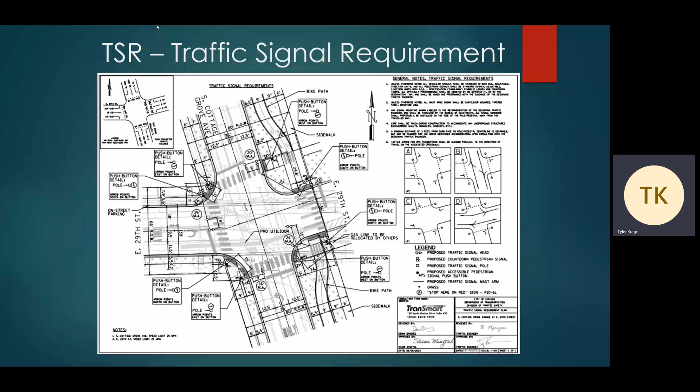Moving on, we talked about TCS. That is essentially our conduit plan. It stands for traffic control signals. I didn't say that up on top because it's kind of more than that, right? It's a unique idea that engineering builds this whole thing, and it's looking at what foundations are needed, looking at the conduit types that are needed, looking at cables, looking at all of the hard engineering type side of things like that. So we will not go into that as much today - those are in another realm of CDOT.

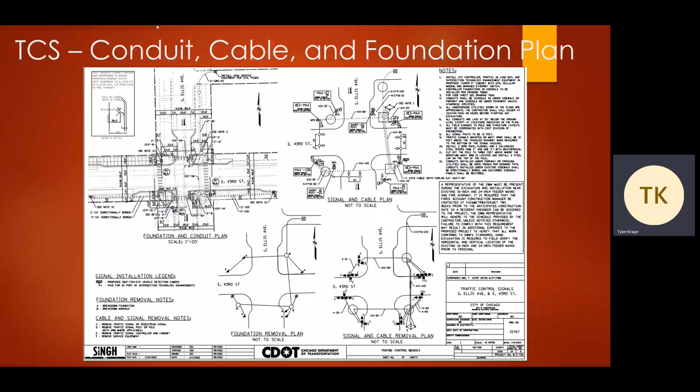Maybe we'll do another one of those later someday, but we're not going to do that today. What we will talk about is the TS - timing, schedule, plan.

What is the signal timing that we put into the controller? That's what these sheets dictate. On the left side, you can see we have a NEMA plan, the Cadillac of what timing sheets are, and there's a lot of adaptability with these.

So every time we're putting in a new signal, we're using NEMA. On the right side is an interval sheet. Before I came here, I'd never seen an interval sheet before. It does exactly what you tell it to do, right?

So the thought is that there's not a standard, there's not a conflict monitor necessarily, but essentially each one of those grids and the filled in blanks and the table on the bottom there, that's essentially telling what is running with what. You're looking at every single signal head. You're deciding, hey, this is R3, or maybe green 3, or whatever it's designated as, and that tells you what it's doing at that certain interval.

We still have intervals, but as we're going through, we are updating all interval sheets to be NEMA. It's just there's a controller update that's needed, and there's a lot of work that goes into it. So we're moving to the spot where NEMA is the new standard.

We still have a few—shouldn't say a few. We have 3,000 signals. We have a good amount, probably half are in interval. So we're getting there.

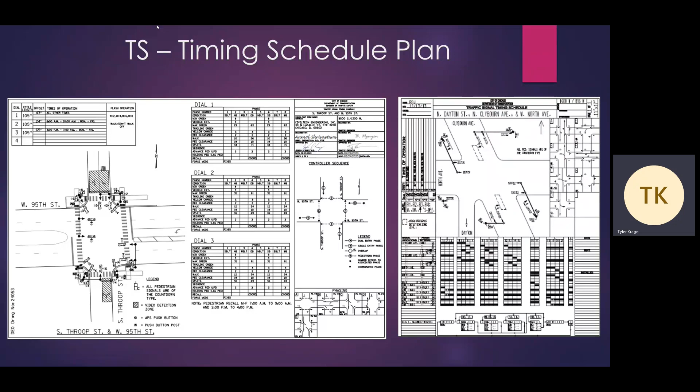Okay, so what does this stuff even mean? Where are we even at in the process, right? All these letters mean something, right? We don't just do this stuff for fun. Here's the process of what it looks like, right?

So what happens is traffic safety receives a TSR, the traffic signal requirement, and that tells us everything about where the design is. We'll review it, give comment on it, and we'll approve it once it's set and meets CDOT standard and compliance of CDOT rules, essentially. Once that is set, the TCS plan can get made.

So we'll send this to engineering. They will not start a TCS plan unless the TSR is already approved and made. The reason being is that things can change—you can move poles here and there. They don't want to even start until it's fully fleshed out and approved.

There's a few situations where we're allowing that to happen because of expedited things. So if you're working on a project where we're not done doing the TSR yet, that's because of that. We're experimenting a little bit with doing the TCS and the TSR in parallel, and then anytime there's a conflict, we update the TSR, put out a revision, that type of thing.

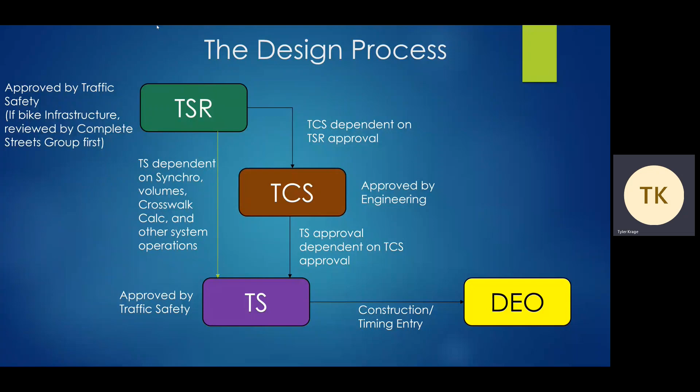So that's the idea behind the process. How do we make our lives easier? How do we make my life easier? How do we make your life easier? So what we did is we built a QA document looking at everything we think about when looking at timing sheets, when looking at TSRs—any of these things we check. How can we keep tabs on what needs to go into this sheet, just as a guideline?

I should add a clarifying point here too. Up in the corner, it says draft in big bold red letters. That will probably never change—this will be a living document. The city is adapting, we're learning new things, we're trying new things. We don't want anybody to say, 'we did exactly what you said, so it should be good, we don't have to think about it.' We don't want that to be the case. This is going to be a living thing.

We will figure out some way to get it posted online or sent out—we'll figure that out when the time comes. The point is, this is a draft. So yeah, that's one thing to think about.

The other thing to think about is, as consultants, you're putting your name on these things that are getting built. At CDOT, we're putting our names on it, but we're also asking consultants to put their name on it too. We need to make sure QA/QC is happening, because not only will it make your lives easier for deadlines and for going back and forth on comments, but the more rounds of iterative comments you have going back and forth, the worse it's going to be.

So please make sure that as a consultant—or if you're an entry-level engineer, a professional, or the person approving or reviewing this stuff—we really need to make sure these are getting looked at. Out of all these, we have a few consultants where we're fully confident in what they do; we'll still check it, but there's a few where we're excited to see the work they give. Sometimes we do not have that, and we know who those people are.

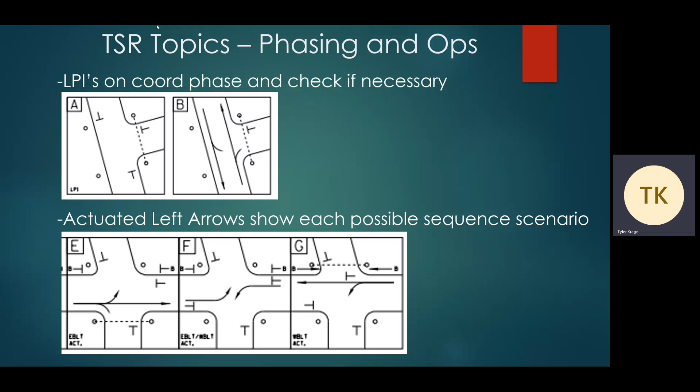So I'm going to jump into the next one, which is a lot of what we dig into when we're looking at these TSRs: where do we put these signal heads? Because we want to make sure that these are exactly what we say they are. We do a heavy amount of review on this.

As many of you may know, we want to make sure that things are as good as they could possibly be. We have a very litigious constituent, so we want to make sure that these are following everything down to a T, and that there's no chances of error or anything causing any mishaps. So that's what this is about.

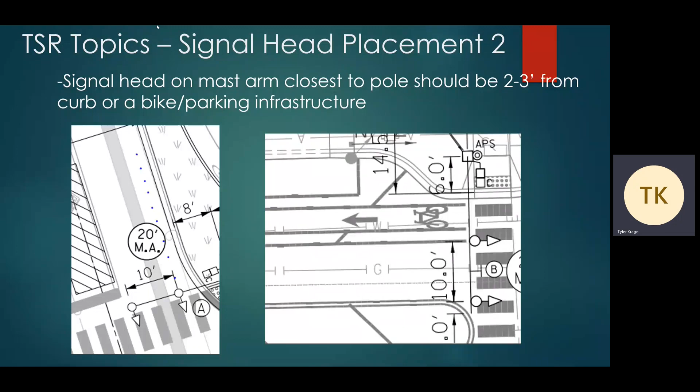So that's just what it is. We can dig into that on why we do that with primaries and that type of stuff. We'll get there if people have questions on it, but for now we're not going to.

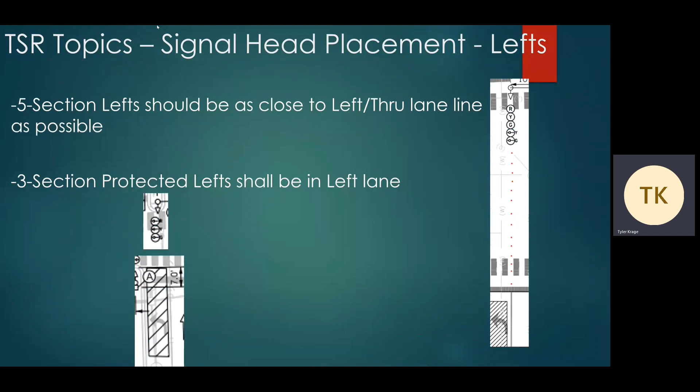At some point we're getting to the point of thinking, oh, well, 2 plus 2 is this because it is, right? So we're going to get into some more interesting stuff later here, I promise.

I have a question for you, Tyler. So left turn lane, 3-section head shall be aligned with the left turn lane. If we're shifting a left turn lane, what is your cutoff for needing to then shift the 3-section head? If it's aligned with the edge of the lane line, is that acceptable, or do we need to shift it? If it's a foot off the lane line, is that a definite, we need to shift it if we're shifting a left turn lane? For example, to accommodate protected bike lanes.

Right, I think I need to actually understand what you're asking. You're saying, would you rather, if you have a protected left, ask your question one more time. If you needed to shift an existing left turn lane at an intersection that has a 3-section head with a dedicated left, just for that left turn lane.

What is the cutoff for, okay, all right, we're shifting this left turn lane 5 feet, and now that signal head is no longer aligned with the center of the left turn lane. It's now 5 feet to the right, like the edge of the left turn line. At what point is that like too much of a shift where you say, okay, now we need to extend the mast arm, we need to shift the case by case?

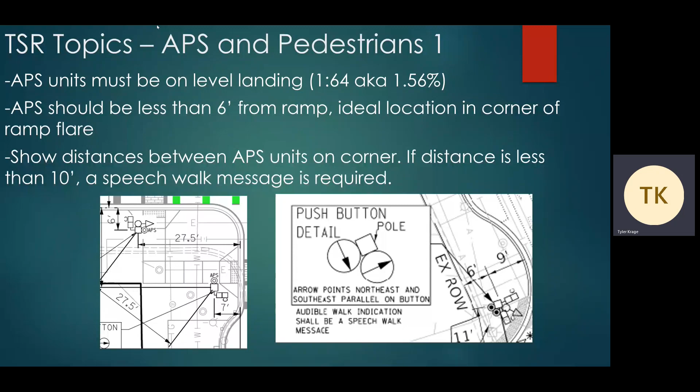The one on the bottom is the salt shed. If anyone hasn't been there yet, it's a cool spot. That's Magnolia Blackhawk - we did a lot of work on that intersection. This is the unique situation, there's a lot that happened here and a lot going on here. So if you're catching a show there, check it out. People love it when you're with your friends or significant other and you're showing off your amazing traffic signal knowledge.

It should be flush with that intersection. 10 inches is the smallest extender that we can get. So if it's smaller than 10, that's also allowed within ADA requirements and CDOT compliance. But if it's more than 10 inches, that will need an extender.

This location actually did use that. It wasn't necessarily right there, but that distance needed an extension because it was just too far to get pushed. It was just far enough out of the way.

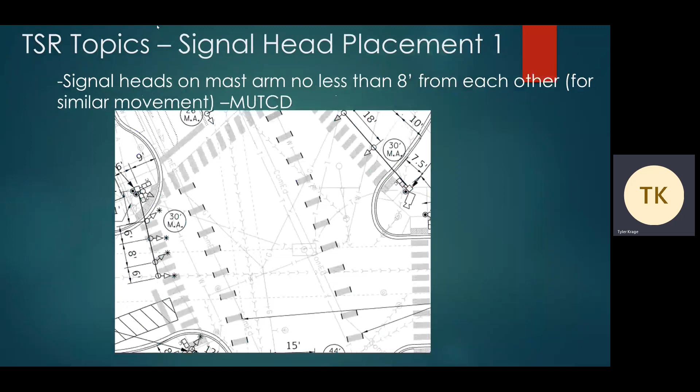So when you're doing these TSRs, it's really important to make sure that, since we're doing a lot of new developments, if you have maybe not necessarily parkway but possibly a concrete curb dropping with a ramp going down, that needs to be as flush as possible with the accessible path. If not, it'll need an extension.

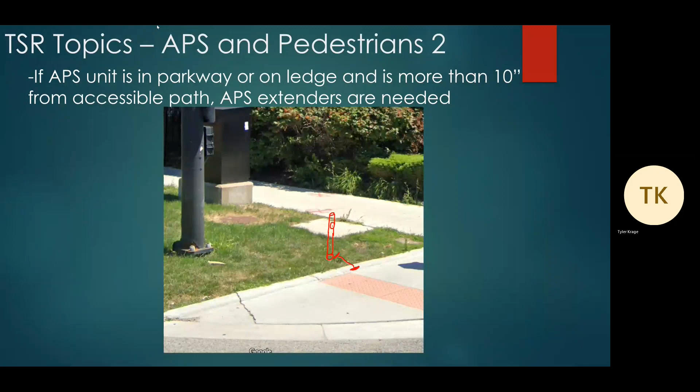In this situation, I think we had about 5 feet from the ramp to where the pole would be. I don't think this is a real location—this is just one I found that had a lot of sidewalk.

5 feet is, if you look in the MUTCD, there's a clause allowing a certain distance of viewing within 10 feet or so from the crosswalk. 5 feet is around the spot where it's unreasonable to expect a pedestrian to see the whole way.

On a similar thought, although you may be able to see it, we don't like to have the ped head farther than 15 feet behind the ramp. While you may see it, it's just better to have it closer for ideal pedestrian use.

And Kurt, yeah, go for it. All these dimensions you're talking about are to center of pole, right? Yes. Or face of curb? Yep.

Okay, do you have any guidance on when you can't put the signal pole right next to the crosswalk and you need an APS—any guidance on trying to move the signal pole versus putting a separate push-button-only post? Just whatever works, case by case.

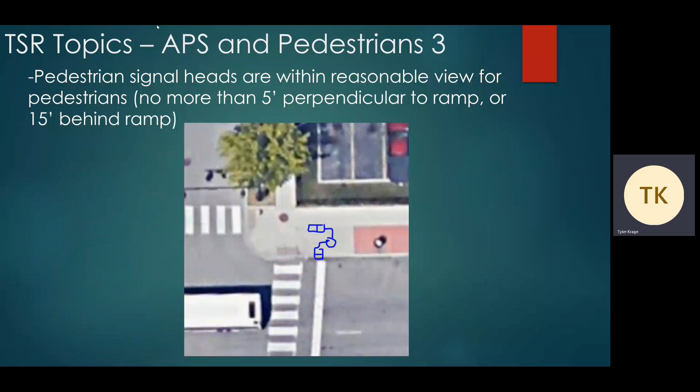Good question. Kurt is gone, but you could probably talk more about this stuff too. When we're doing our review, obviously we have the bike group review all these, but we have some things we think about with bikes as well. The first one, I already said that: make sure that Kurt and Gina and the Complete Streets group are looking at all these plans.

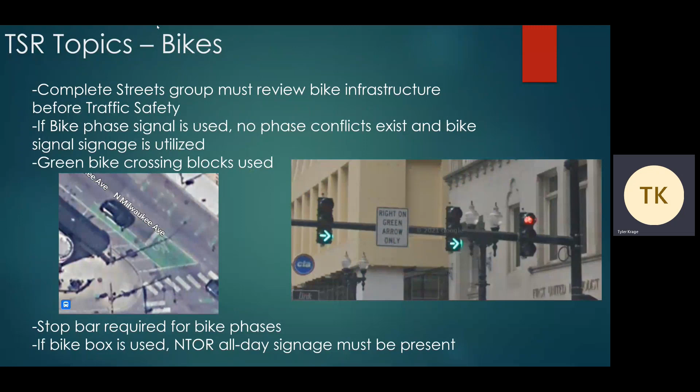TCS guidelines, tough, sorry, we're not talking about that today. We are talking about timing sheets though. So what we're going to do is flip to our QC document. I should be careful mixing up my quality abbreviations here. But looking at this first one, there's two really, really big ones.

And the first big one is housekeeping. When we get timing sheets, a lot of work goes into a timing sheet. You need to have your synchros made. You need to have your crosswalk calculations all made up. All that stuff needs to be made so you can put the final product onto this. So essentially, this is one of the last parts of your design. What are you telling the operations to do?

But the idea here is that you're adding in the distance to the push button to the curb. That is a MUTCD 3 feet per second check. It assumes 6 feet if there's nothing, if there's no push button there. And then the last column is just showing the required walk time needed.

So what happens is with that 3 feet per second check, you'll need to add any time that is needed, needs to go to the walk. The walk is dependent on the split a lot of times. So this is just a thing to check to say that, oh, my required walk time is actually 8 seconds.

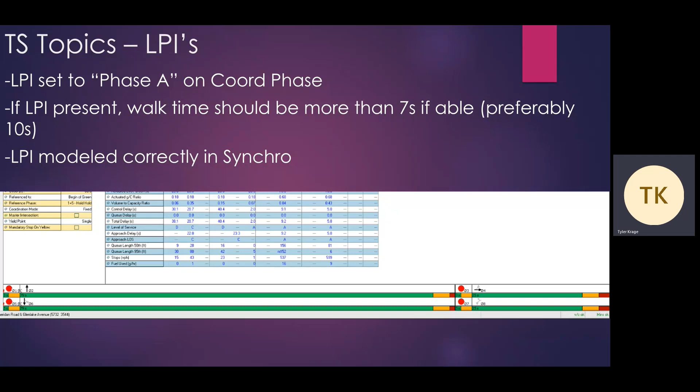Another case we talked about - geometry, signal geometry, all that type of stuff. NEMA convention - we're lucky here in Illinois, in Chicago, we like to have a consistent NEMA intersection. This is probably not news to anybody, but we like to have phase 2 facing north, phase 6 facing south, and then the corresponding NEMA to match. Some places, as many know, will use the main line as phase 2. We've got to standardize, so that's great. The issue is that sometimes it makes it harder for a horizontal street or an east-west type street to figure out what's what, because we still want the coord phase to be north and south as well. We don't always do that, but in most cases we do.

In those cases, if we decide to switch it, we want to make sure we're reflecting the force-off stuff to give time the way it needs to. A lot of times the through phases, the even NEMA phases, are running on PED recall anyway, so it doesn't necessarily matter if it's north-south or east-west or coordinated. We just like to keep it north and south unless there's a reason we shouldn't. Sometimes those reasons are precedent - they did it that way for a reason, we want it that way. Sometimes it's because we can't get it to operate the way we want using the force-offs and tricking the controller into giving time the right way. Some of it might just be that's the way the rest of the corridor is. So that's a very fluffy one, but that's the thought behind it.

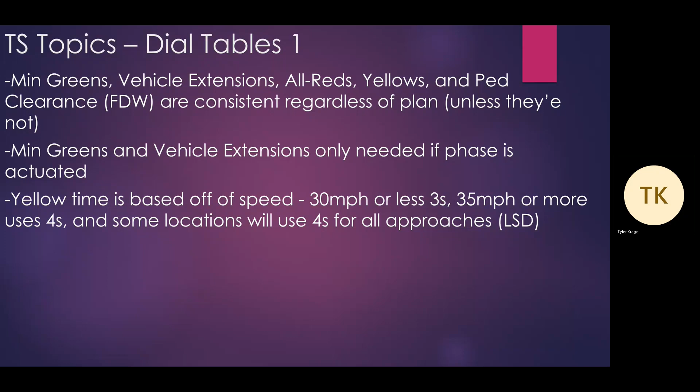The other part, the boring part, but one of the most important parts - the math, right? All this stuff is math.

Some of it is actually a deciding factor, but some of these things are just things we care about internally and want to make sure are getting reflected. So obviously your splits, you want those to be right. You're making a timing sheet, not rocket science. You want your sheet to match what your synchro says.

Those splits are in the 11th column, I believe, so those are right from synchro. Max green and walk time, those numbers are calculated. We're working on an automatic NEMA table. If you have one, send it to us, we'll check it out. There's no reason we need to be hand typing some of this stuff in. We can make our lives easier, but we're working on that and how we can get it as optimal as possible, because really your max green is just an equation we care about internally.

It's a value, but it's not really something that's entered into a controller or decided. It's just math: your split minus your LPI minus your yellow minus red, that's how long your signal is green for. And then the walk is that same number, subtracting the flash don't walk and putting the LPI back on there. So we talked about the 3.5 feet per second MUTCD check.

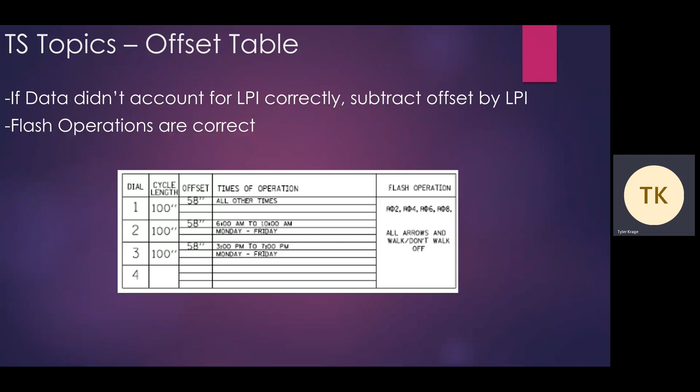If it's protected arrows, we might, depending on what's happening, flash different movements. I think when there's a FYA phase, we need to flash it, things like that. So overlaps, a lot of overlap stuff has to get denoted in that. And that is it. Go for it.

Offset question. In synchro, what do you guys prefer to see, like beginning of green, beginning of yellow, first green? Beginning of green. Yep, beginning of green for your offset reference 0 points. Yeah. Anything else? Yep.

Can I just ask a question about the offsets in general? Since you guys don't have systems and no master intersections, what is that actually referencing as a 0 point? Absolute 0 is what these use. And if you know what that is, he's laughing because it's what the controllers use. We're building out our system, we're connecting our system, we're using cell modems and Miovision and other tools to make sure that things are actually where they say they are and there's not drift occurring. But that is what they are calling it. We'll talk more about that offline if we need to.

Yeah, so that's a good point. That's usually we would. In this situation, we did not for some reason, just because there's the PED phase for 2 is there, but you are right, that could be a 2. Honestly, this phasing is more of an informative thing. If there's a vehicle phase there, we definitely would.

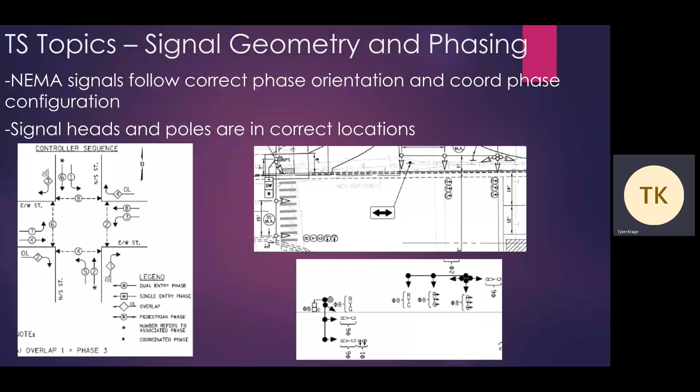Just confirming, just... No, I get it. I don't know what goes fully into those. Okay, good point though. I don't know if you guys... I know, no, you said it wasn't your department, but... No, we review it, we don't approve it. Okay, I don't need more to do. We got people that are better at it than me to do that. Fair enough, no, good point though, good question.

Yep, last one, go for it. Oh, we got time, we can have more questions if you guys want. Just a quick one. Temporary traffic signal installation. You need a dedicated temporary TSR?

Yes, for temporary. So one of the things that we have in this electronic document is a temp TSR QA/QC document. The reason we didn't show it was also for lack of time, but also because that's getting finalized. But anytime you're doing temporary control and the lanes are shifting, the signal heads are shifting, anything is differing from the normal operations, yes, we need a temporary TSR.

Span wires, dimensions of where those things are going. It doesn't need to be as in-depth as showing utilities and stuff like that, but we want it to be to scale, and we want it to show this is where we want this thing to be. We haven't always done that. We're starting to do it now, just because during construction, so much can happen. We want to make sure that we are approving what's happening and that things are going the way they should be going.

At least we said that they should do that. Whether it gets built like that, that's up to them. Maybe that's the reason for not doing it, but we told them to do this, do it, you know what I mean?

So, but great point. With that, we have the signal heads, lane locations, we have what's getting closed, pedestrian movements, if you're having push buttons, those type of things. So it's kind of a diet, people have called it a mini TSR, but I don't want to think of it as a mini TSR, I want to think of it as a temporary TSR. And usually that is, you can just put that on top of the document you're working with, and span wires and dimensions and stuff like that. Great question.